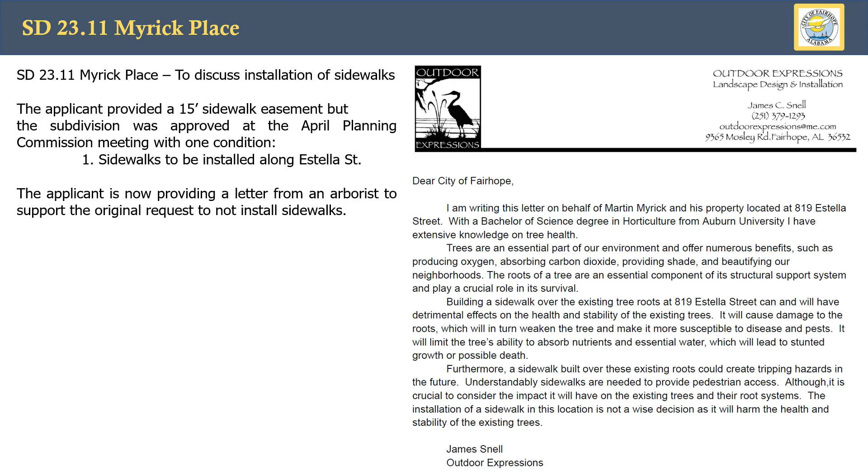They have since submitted a letter from the arborist supporting the easement only in lieu of installing the sidewalks there, due to the location of the trees. A copy of the plat, just as a refresher of where this is: it is one lot off of Greeno on the west side of the road. The applicant provided, we have Seth Moore and I believe Mr. Myrick with us here tonight to help answer some questions and go over their request in more detail.

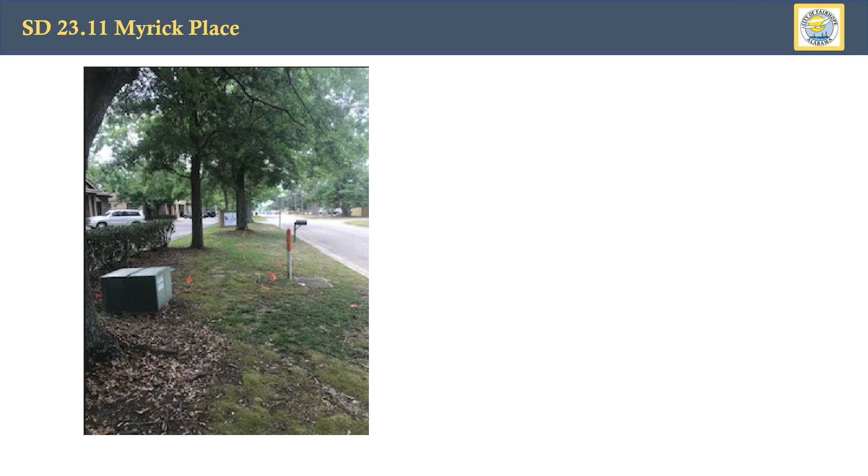Some images supplied by the applicant. One solution they have proposed, and I have a copy of that here as well, is doing some striping of a sidewalk area along this curb line that you see looking west from the east lot line of Lot 1, the image on your left. And an image looking back down the street next to the right-of-way where the sidewalk would go. You can see the trees in the image there.

This was the proposed plan, received this late this afternoon with those other images. This is a proposed 5-foot walkway that would be within that 15-foot sidewalk easement, a painted 5-foot wide walkway. But we have Seth Moore and Mr. Myrick, if you guys want to get up and discuss your options and what you're thinking about doing. Yes, thank you.

I'm Seth Moore with Moore Surveying.

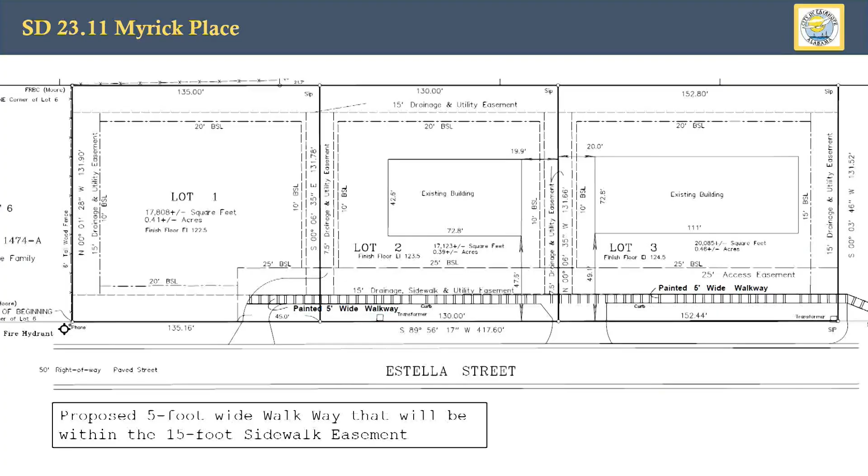As you can see in this photo, and in one of the others, without disturbing the ground around those oak trees, with the roots already on top of the ground being cut by the lawnmowers as they go along, we could easily come in and paint, like you would a crosswalk across a street, a walkway within that asphalt area that's already existing.

That's within that 15-foot easement. As the arborist mentioned, if we put that sidewalk in 2 or 3 feet off the edge of the curb, we're going to be cutting into the major roots of those oak trees. There are some pretty good sized oak trees and a couple of cypress in that area. If y'all have any questions, I'd be glad to answer.

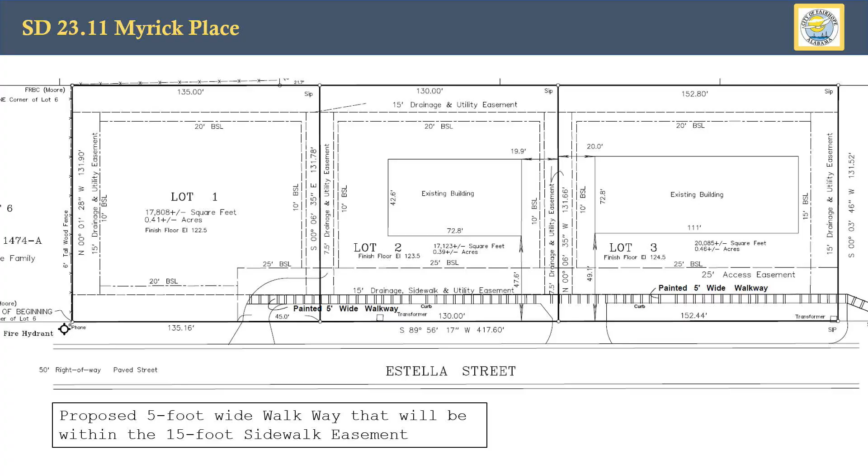So what's going to happen where that painted sidewalk stops? On the east side? On the west side? On the west side, what I envision is they're going to build a building, most likely just like they already have, with an entrance and exit, continuing the same thing along the asphalt and curbing.

That portion in Lot 1, they could build a sidewalk there. Yes, they could build a sidewalk there, sir. And we could angle it down, come back in when that building is built, and change the striping a little bit to connect up with that sidewalk along the front property line.

Commissioners, any questions? Mr. Moore, so as it's drawn, the sidewalk extends by 30% of Lot 1, and you say that would be built in the future when something is built on that lot. Why does that not extend to the end of that lot so it becomes more public access when somebody wants to build from the west to the east?

It is a 15-foot utility sidewalk easement, according to the plat. So when they build that building on Lot 1, they can put that concrete sidewalk in. And of course, not extending it straight on that way - what I envision is they come back and move it closer to the road.

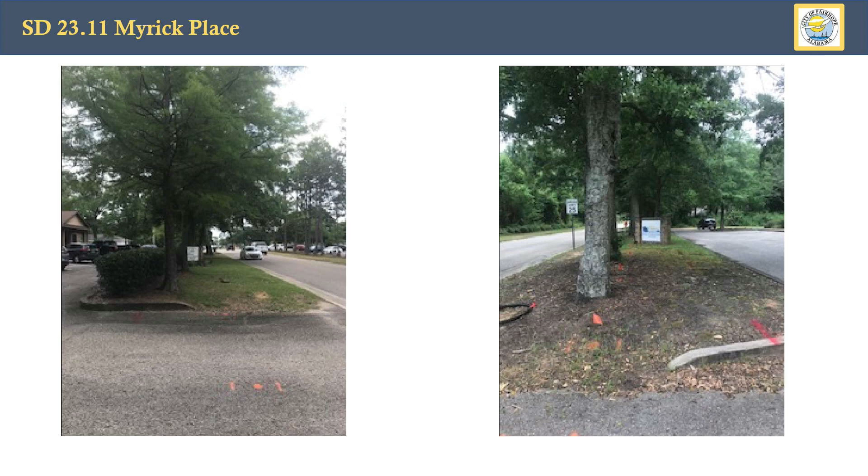What I would do is come to where that curb is on the left-hand side of the picture, then angle the painting of the striping to where the sidewalk would begin, on the west side of that turn-in. If you look on Lot 1, there is an ingress/egress to Estella Street. You would start your sidewalk at that western edge of the asphalt and go to the property line when they construct the building on Lot 1.

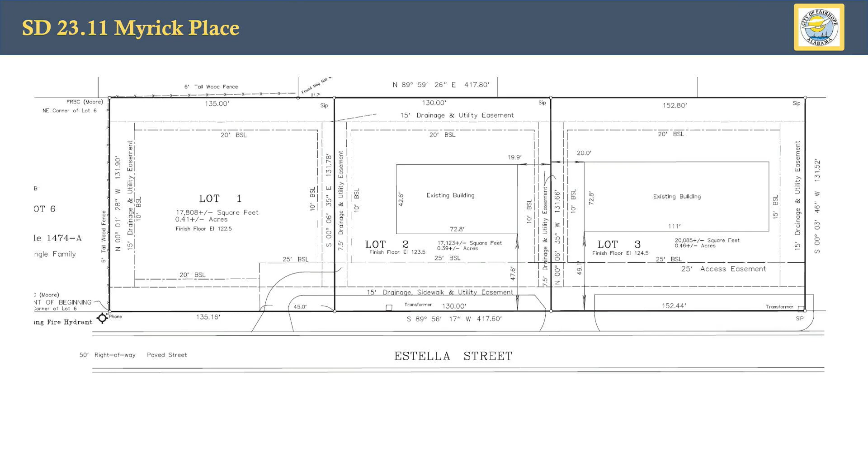So I'm just trying to follow - are we painting grass? Is this what we're talking about? No. There is asphalt.

No, on the first part, when you're talking about painting - see the left picture there? There's a curb that goes all the way down. They're talking about painting a sidewalk where that curb on the left would be the end of a 5-foot painted area, basically up against that curb. It would look like how you paint a crosswalk when you cross a street - that same thing running parallel to the street from the east line of Lot 1, going all the way past the common line between Lot 1 and Lot 2. Then when they build on Lot 1, like you do a residence most of the time, you build the sidewalk at that time. Yeah, just draw it right on that.

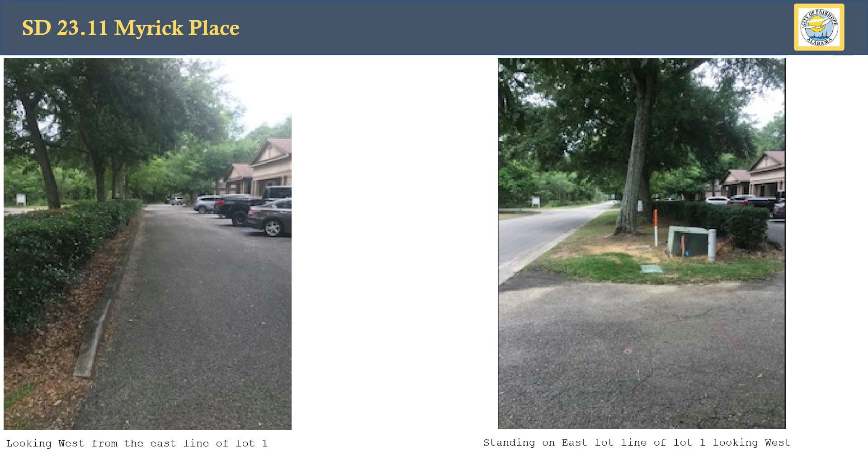I really appreciate every option we have. And there is a challenge here, but I do wonder if this is something we have in a few places in town. It gives us heartburn in front of Ace Hardware, where you have cars backing into a crosswalk or a walking path.

I'd at least like to explore Mr. Jeffrey's idea of putting a sidewalk on the other side of the street. There may be some challenges there we don't know about, but at least a big portion of that area is flat and easy to do. I think it's also a perfect area for maybe the city or some other entity to help make a connection to the sidewalk on Greeno Road. Just a thought. I'd like to explore that option before we commit to this, because this is a condition we're trying to get rid of around town.

It's also right in front of Provision. And if we're talking a public sidewalk, you've got ADA issues with cross slope and surface roughness. One of the things we battle during home construction is sidewalks have to be laid out first, and then your ramp up from the road has to match that. What we often see is the ramp up for the drive, and then the sidewalk hits it tilted the wrong way. So laying them out correctly from the beginning gives us a clean slate.

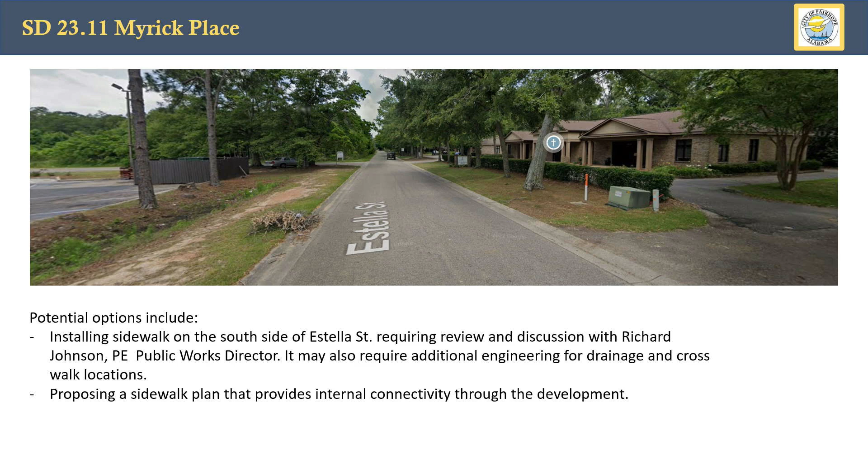Right, Mr. Moore. Yes sir, can I ask another question? Yes sir, real quick Mr. Chairman, if I may? Sure. And also Mr. Myrick—

Hypothetically, if there was a sidewalk built on the south side of the road as opposed to the north side, would you be opposed to that?

No, the only concern, the only reason I'm concerned is because I'm not opposed to a sidewalk, I'm just opposed to possibly killing some of my trees. That's the only thing, that's my only concern.

If we move it across the street, as Hunter was saying, as a council member I can't see committing funds to that. Everybody in town wants a sidewalk in front of my house, I promise you. But that is a connector, and part of another organization's push for sidewalks, and I know some others are being constructed. It just allows me to seek some funding for that, if it was even a possibility.

It definitely looks like you got more room across the street just from that picture, for sure.

As Eric points out, we tend to gloss over these things, but when you have ADA issues, it's sometimes not so simple just to build a concrete sidewalk. You don't have the room or the topography to do it, so you may have to put it on the other side. You probably have it a lot easier on the other side than on the north side, because there's a grade in several areas, coming up to the tree level, a good 1.5 feet, which would not meet ADA if done on the grade.

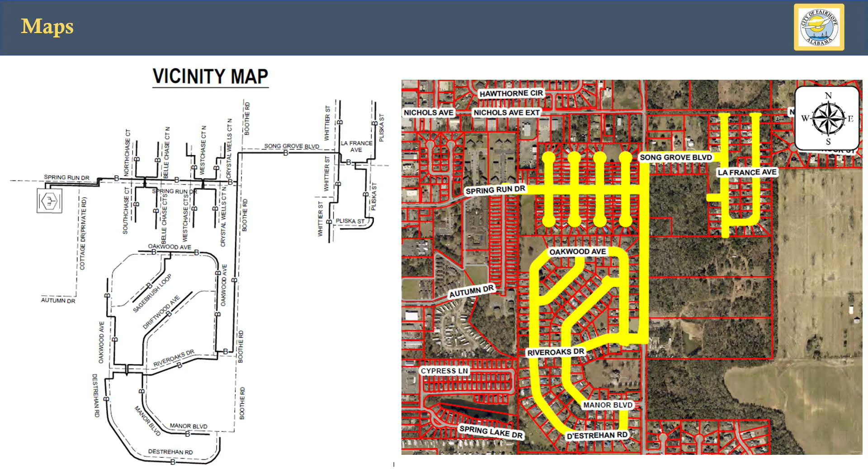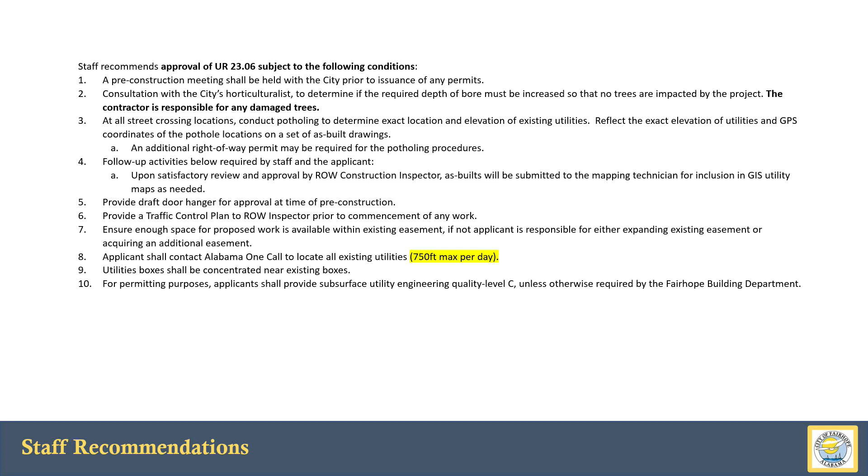Just showing you the area where they're proposing to install under this permit. We've reviewed it, we do not have any questions, so it's pretty standard. These are the same conditions, we don't have any new conditions. We'll typically talk about them if we do, but these are the same 10 conditions we use for these utility reviews. If you have any questions, I'll be happy to answer them, but otherwise this is pretty standard.

They're going to do door hangers? Yes. River Oaks is pretty standard.

West Chase Court is tight. That's a lot, that's really dense. Everyone else is familiar with that. We do require door hangers; before they start working they have to put up contact info, and we actually call and check that number to make sure it's somebody who can answer a question about this project directly with AT&T. So before they get started with work they have to do that, so there is someone a resident can ask what it's going to look like. That one especially could be disruptive, because everybody parks on the street, on the driveway, on the sidewalks. Just familiar where that is, it is pretty tight. I think those were the R3 PGH at the time, so real tight.

But no other question there, so we do recommend approval with our standard 10 conditions for these 11-52-11 reviews.

All right, UR 2306, do I have any questions? I have a motion to grant the request. Do I have a second? Second. Is that subject to staff recommendations, Jack? Subject to staff recommendation. Do I have a second? Second. Any further? All in favor say aye. Aye. Any opposed say nay.

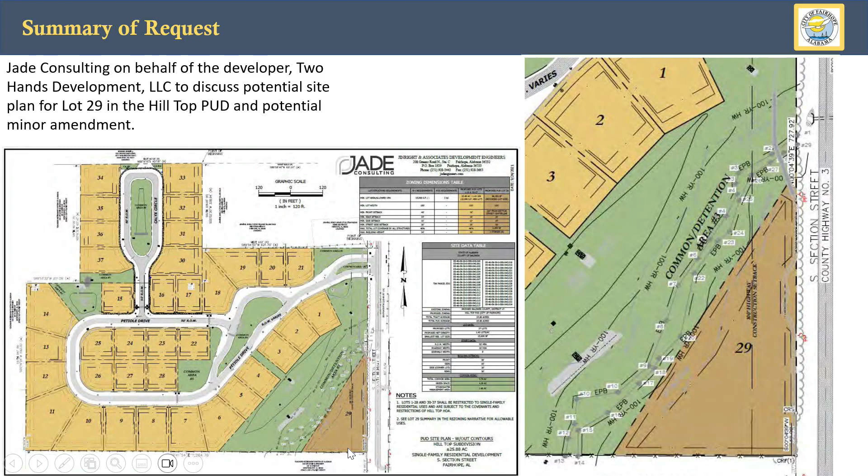There's a little bit more, and there's one plan that's tentatively going to be shown tonight, and there's another one as well that meets the 100-foot setback. But the real question is we'd have to amend the PUD, because that 100-foot setback made its way into the PUD as approved by City Council.

That has to be amended to do anything else, but that's where the conversation is. I'm going to let Trey really just speak about the building, but I do want to flip to the end. There's some wetlands. I think moving up to the front is something we agree with. When you look south of this property, immediately south, there are buildings 30 feet off the road. You look at some other subdivisions right there, they're also 30 feet off the road, some even closer.

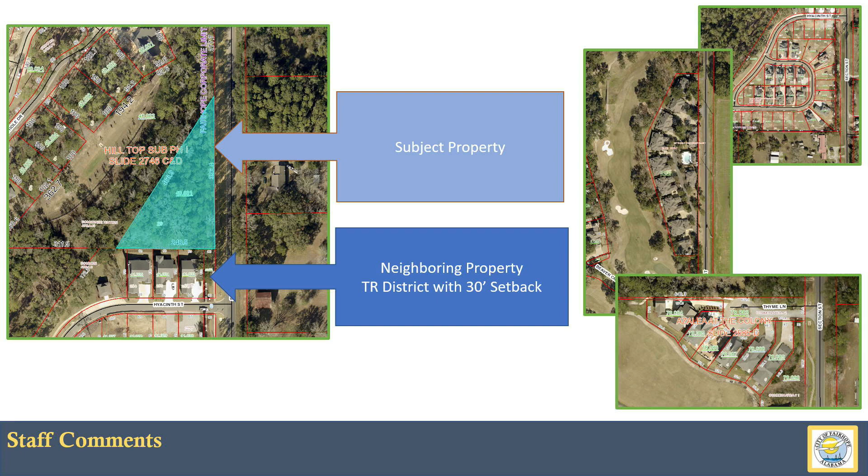So we are in agreement. The informal review here is really to look at the building before they make an application to amend the PUD, because that'll come back to you, but ultimately it'll go to City Council for approval. Trey, you want to add anything on the actual layout and building?

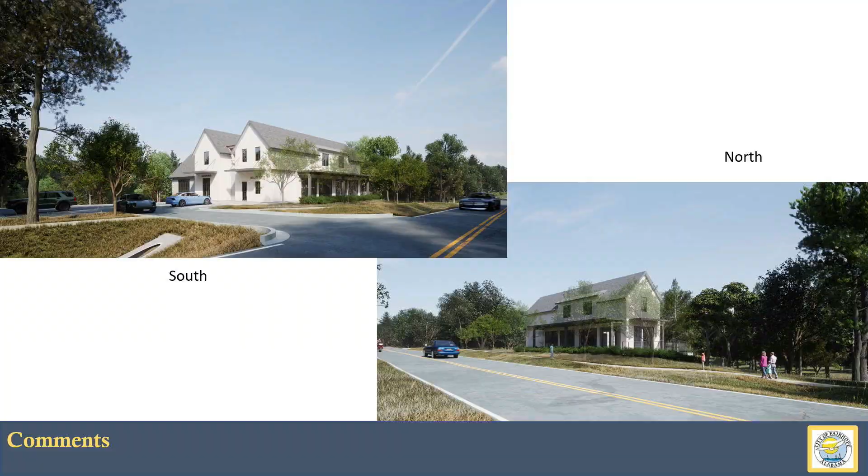If we set a tone here, that'd be an opportunity to build off of it as you move your way into town and out of town. We're also looking at some projects across the street, which would help us figure out how to set up this zone. So that's really where I'm at, and I just wanted to get your feedback. Thank you.

First, I apologize for being late, I got held up. But I know we're not talking about uses, but when Jason first came in, at one point they were talking about possibly a community building or a guest house, or hospitality.

I'm just curious about the uses with the form, if there's anything—it may just be too amorphous. Nothing has been proposed to be changed. There were no specific uses, but there were limits of uses. Anything that kind of gave us heartburn, I think they removed.

They even had some 2-story and 3-story proposals. It was weird the way the land fell, and pushing it all the way back toward the wetland buffer starts getting into some trickier situations.

I don't think we're really discussing any further limitations on the uses at this point. I think what's in there—and these projects all run together, so please excuse me if I state it wrong—but I think it's probably maybe a market in there, a coffee shop kind of use. There may be an art gallery in the back there, okay. And then maybe some short-term rental type deals upstairs.

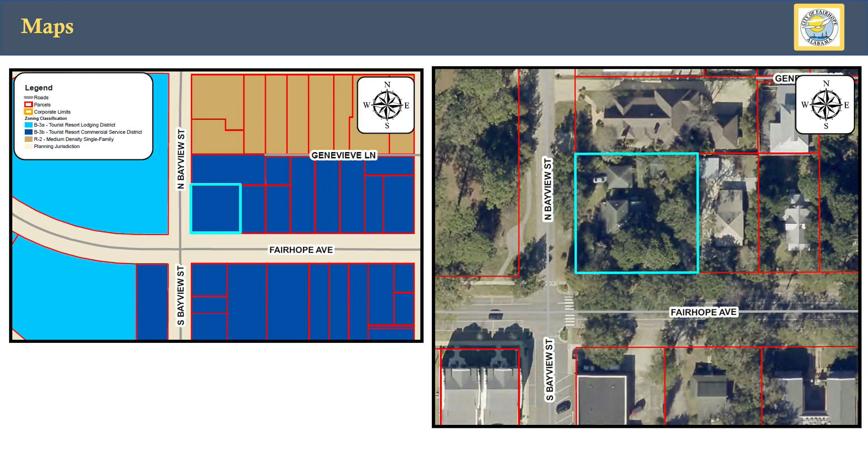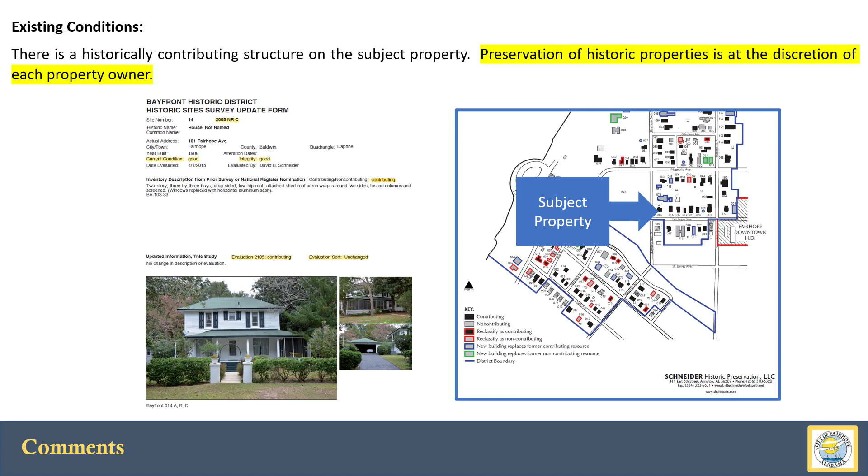So we've reviewed this per the subdivision regulations. MOPs with 4 or fewer units are eligible to submit an application for both simultaneous preliminary and final approval. The site plan is on the screen below. It shows 4 buildings, common areas, the interior private open space, if you will, the courtyard shown in yellow, and the shared drive on the north side of the property.

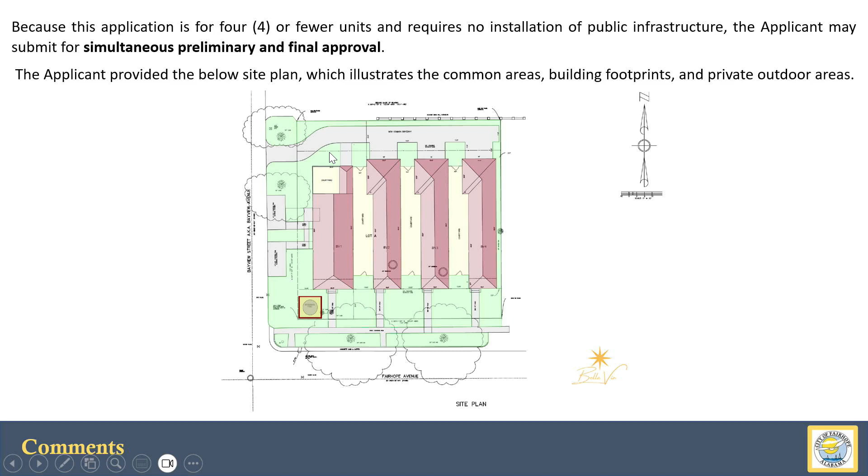Parking, the zoning ordinance requires 2 parking spaces per residence, which would mean 8 spaces on site. So the applicant, to avoid removing a street tree—originally the drive went through where this tree is, and parking was provided here, but the driveway was moved to avoid that tree. But that took out 2 parking spaces there, so the applicant has proposed to install 2 parking spaces in the right-of-way, getting credit for 2 other spaces nearby, or provide bike parking. That ratio is allowed at a 2-to-1 rate, so the Planning Commission may grant the credits for that on-street parking. I highlighted those because those are an action item.

If approved, the parking pads on North Bayview will be pervious and approved by the City of Fairhope Public Works Department. There was already agreement that those would be pervious pavers if approved.

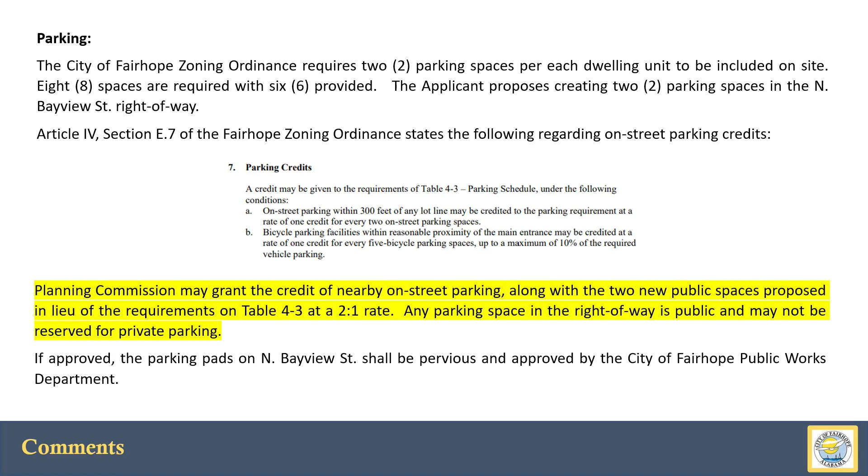The utilities are all provided by Fairhope. This is the utility plan presented. The electric department will require a 10 by 15-foot easement for an electrical transformer if approved. The drainage plan was conducted by Jason Estes with Dewberry.

It's basically collected as part of the MOP infrastructure in underground pipes that will feed into a drainage basin, and they've met all of our subdivision regulations. We will require, if approved, all the homes to have gutters and tie those gutters into that system.

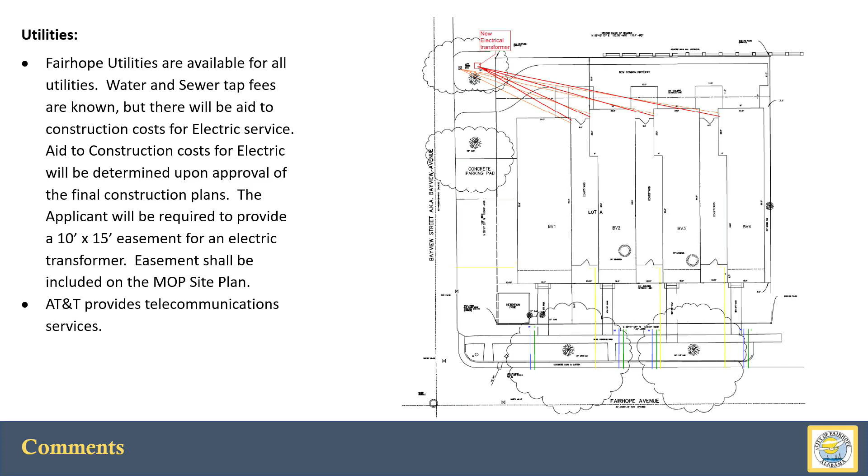Just a couple of notes here. A grading and BMP plan will be required for the permit, for the land disturbance permit to install that drainage infrastructure. There is a little bit of a conflict—I'll get into this a little later—but the site plan shows 65% lot coverage on each of the condo lots, where the verbiage of the condominium plat shows 75%. So there's a little conflict there as to which rules, but we're saying here 65% unless we change it, making sure the drainage accounts for those rooftops.

We do require as a MOP, since it's a subdivision, an O&M plan that shows how to maintain that drainage system. We have not received that at this time. There is a drainage basin, essentially a wall filled with gravel that recesses down.

There was a proposal, and we saw some ideas. I think it was a good idea in this situation. It's not just a gravel drainage basin, you can actually incorporate fountains or sculptural elements. Final designs haven't been approved, but I think the concept is admirable.

Per Richard Johnson, since we have this drainage plan, this comes up quite a bit on what we call the halo easements, the drainage easements around the property. We know where every utility is coming in and what the drainage is doing, so we do not require those halo easements. There are 4 lots where the inline drainage is and the drainage basin on the corner of Fairhope Avenue and North Bayview.

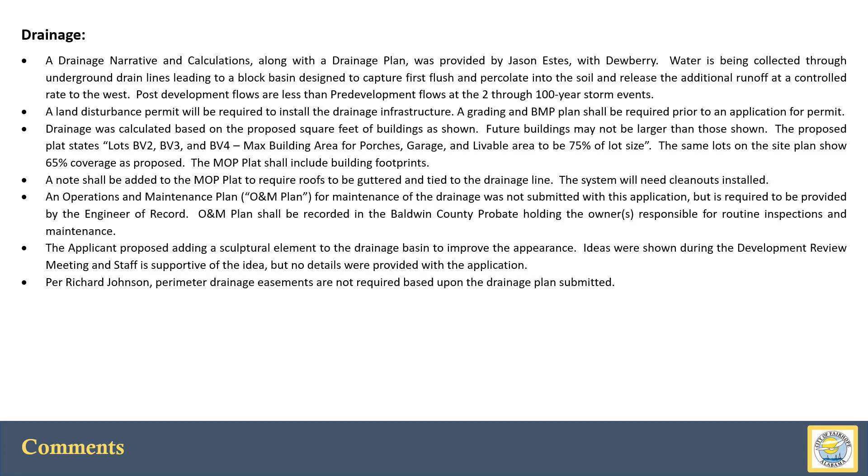Kind of a quick detail of what that looks like. I think this is only a 30-inch wall, but this is showing the subterranean view, where the drain line comes in. It pours here instead of running right off the property onto our right-of-way.

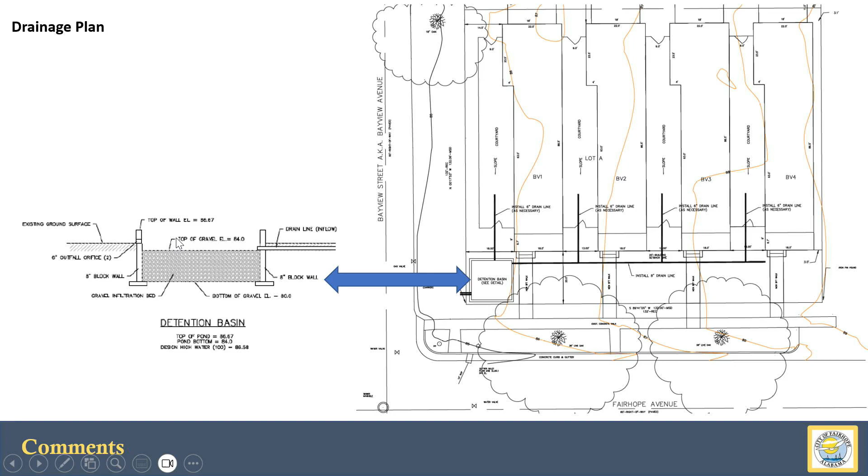Green space meets requirements. This is a small site, 0.4 acres, so there's not too much green space required. It's 20%, but with the 20-foot preserved on Fairhope Avenue and the 10-foot on Bayview, they met that requirement of 20%.

Now, the landscape and trees, this is kind of where we have the biggest contention, I think, if we call it that. There are 2 very large magnolia trees on site, 30 inches and 36 inches in diameter. The applicant did request to remove those trees. Jamie Rollins, our horticulture supervisor, denied the removal. You all saw those letters in your packet.

Jamie can consult with the tree committee on that. The tree committee did vote to recommend allowing the 2 trees to be removed, conditioned on 2 12-inch live oaks being planted in the North Bayview Street right-of-way. While we were there, there was mention of a 22-inch cedar tree also that may be in the right-of-way. They did not recommend approval of that one; it really wasn't discussed.

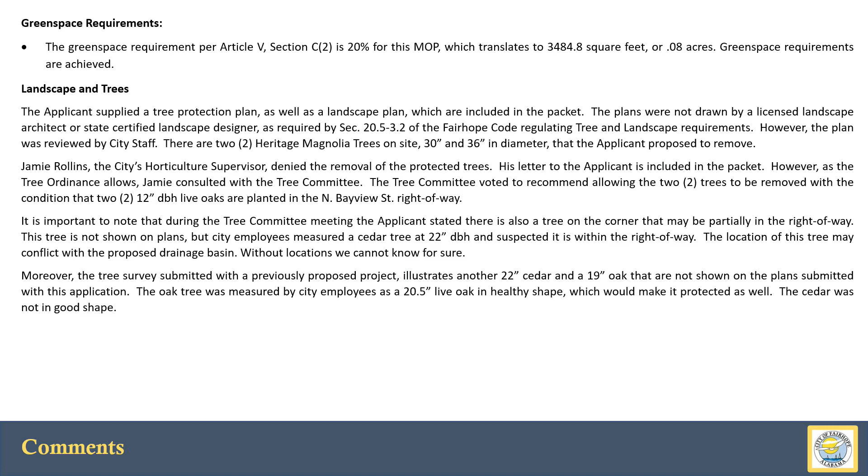We did see an informal review of a project on this site, but it also included the property to the west. It was a 30-unit hotel. They provided a tree survey as well. There are just some conflicts between the two surveys.

The trees shown in yellow were not included on the plan with this application. One of the magnolia trees was shown 10 feet away. Jamie went out Friday and said it's definitely not 10 feet away, but we've got two surveyors surveying the same tree and they're 20 feet off.

There's some confusion there. He did measure, I think this tree was an oak species. I believe I'd say it's a live oak. And this is a cedar tree in very poor health, so it's not worth saving here.

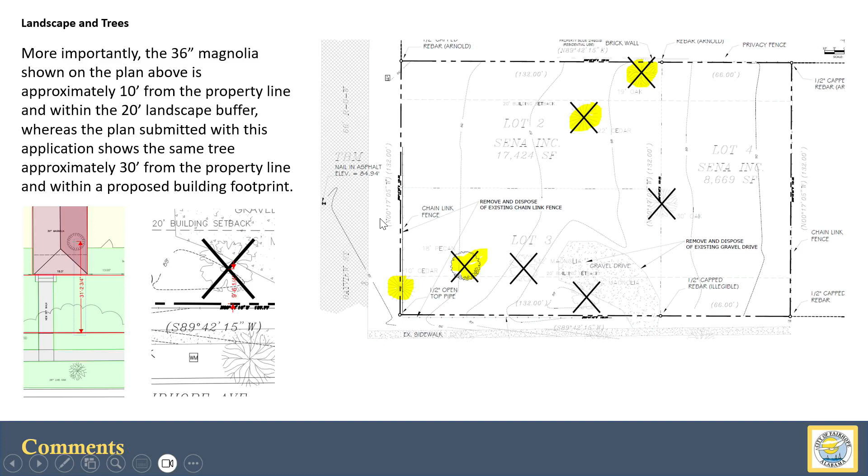But there is a cedar tree here that's partially in the right of way. It is a protected tree. I believe there were two crepe myrtles here in the right of way, also slated to be removed. And I didn't have this one - there's a large water oak here on the property line that was slated to be removed.

Because we don't really know where those trees were, there are tree credits, there's mitigation... Isn't there supposed to be a landscape plan with your application that shows all of this? Yes, that's what I mentioned in the plan. We did not receive that; this was the landscape plan submitted.

It's actually a slightly earlier version of this, so those trees were not on here. And we're kind of saying, hey, we actually need that. That's part of the tree ordinance.

I mean, do trees really matter in that area much? Do we really care about trees that much? Why not just take them all down and go lot line to lot line? I mean, get a bigger building there. Well, you know, not there - get leaves on your car or something.

We've debated, and we did confirm today that Lee and I neither like to be wrong, but I am right in this situation. Heritage trees are protected in the CBD, so we don't allow clearing of trees even in the CBD lot line to lot line.

I'm a fan, I agreed with saving the two magnolias, but some of these others that are not there, they do not have any mitigation. So I think that's one of the challenges here is to prove something, and I get to the point where we don't know the answer. I think they can be preserved. We can deny the removal of those trees, and the only recourse is appealing to our court, not the tree committee.

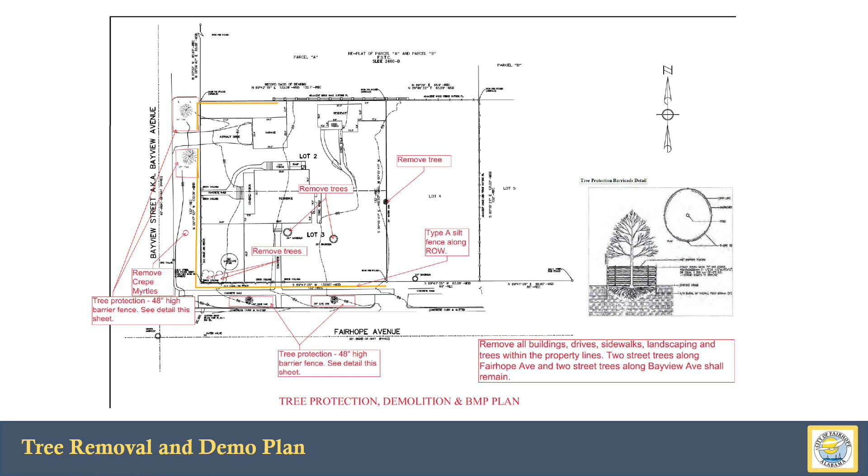Sidewalks: there is a sidewalk on Fairhope Avenue. North Bayview does not have a sidewalk. There's very little room inside the property, so there's not a sidewalk shown, nor is there an easement provided. If the planning commission is willing to allow both of those to go without either the installation of a sidewalk or an easement for a future sidewalk, that will require a waiver. We did not advertise that waiver this month before approving a final plan. Garbage collection is easy.

How will that sidewalk fit in with those two parking spaces? It's a challenge. Could it happen? Absolutely, but we have sidewalks and parking around already.

Now it gets a little trickier when you've got the trees, and the landscape plan did not include the 12-inch oak trees as the tree committee recommended. So figuring all those things out in the landscape plan is what we really need to see. How can that work?

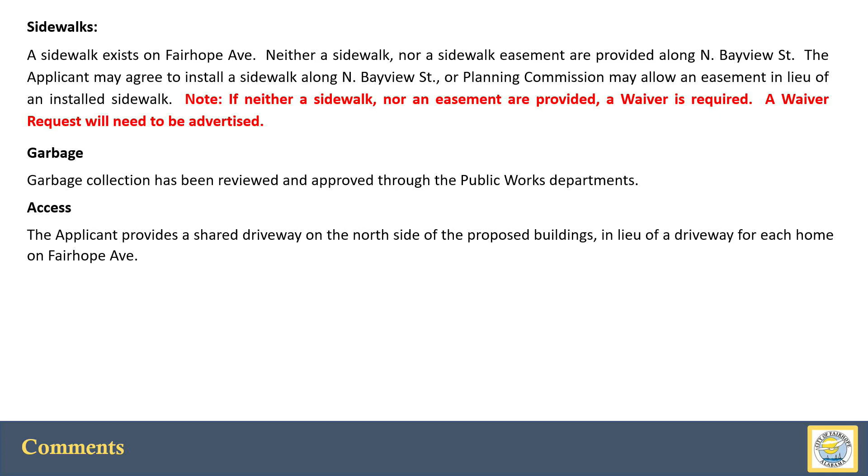Let's say the buildings, by right, B3B allows certain uses. I think it was the intent to use these as single family, which is allowed, but so are other uses. We've talked about this before. Short-term rentals are allowed here. We actually encourage it, it's something that we designed into our zoning ordinance. I do not recommend allowing things like covenants to restrict that to a single-family use to try to override zoning.

There's some allowed by right uses. So if approved, we would recommend some limitations on that on the plat. Some are by right, some are approved via Board of Adjustment.

There would be a MOP plat required at final plat. It's not finalized. We need to have an engineer of record sign that, with a signature block and their certification, and just some of the standard notes. This was the proposed MOP plat. This is a little bit more what I call out in the next one as a condominium plat that really draws out the land condos.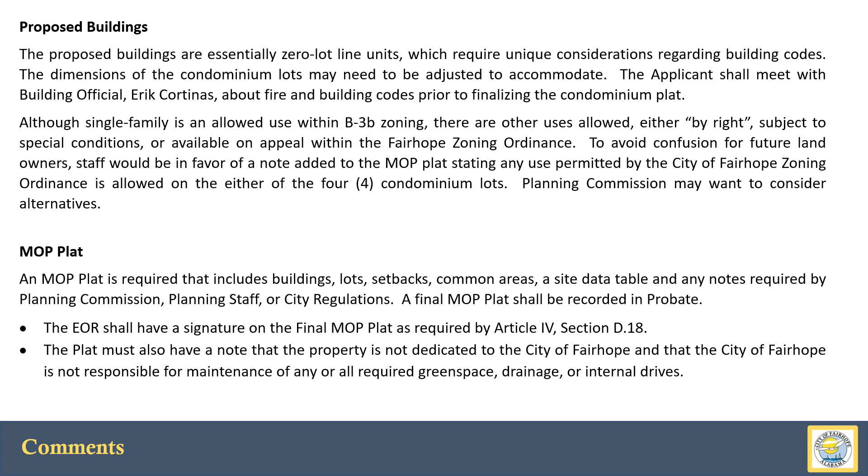Unless we know exactly where the buildings are, I would not recommend putting those on the condominium plat. You'd have to change those every time a building moves a foot to accommodate something. There also would be an administratively approved replat required to combine the lots, as we discussed last month in the informal review.

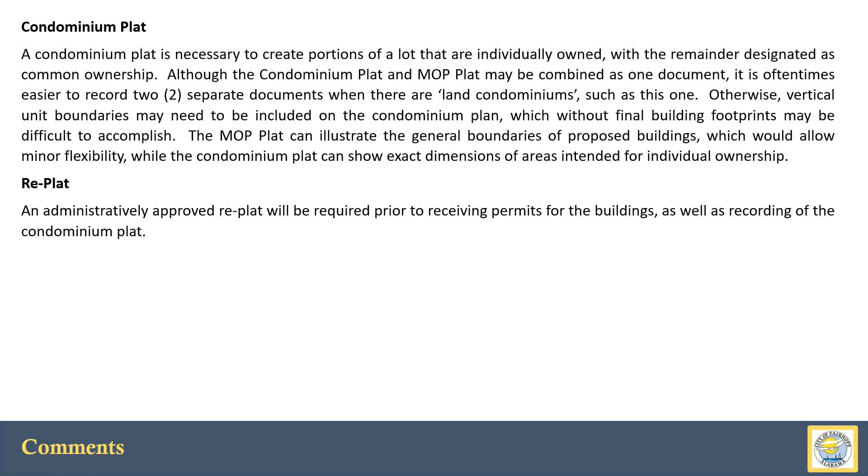So we get to the first question here: it's simultaneous preliminary and final approval. I cannot recommend that we give final approval on that. I feel pretty adamant about that, at least personally. We don't have enough information. Those finals are ready, usually about 90% ready, to submit a building permit and start infrastructure and construction. So the landscape planning in and of itself, we don't know where the trees are, which ones can be saved, which ones, as a city entity, we're going to say you can't remove.

So the domino effect goes: if we say save the cedar tree, the drainage basin has to move. That changes the engineering plan. We're not ready for a final, and I gave some examples there. So we do recommend denial for the preliminary and final approval of this project.

The Planning Commission may condition preliminary approval with conditions, and we made a list. We can talk them through if you want to. I highlighted things that actually require some review, so parking and sidewalks need action if you intend to approve a preliminary review of this. But that's kind of what I have.

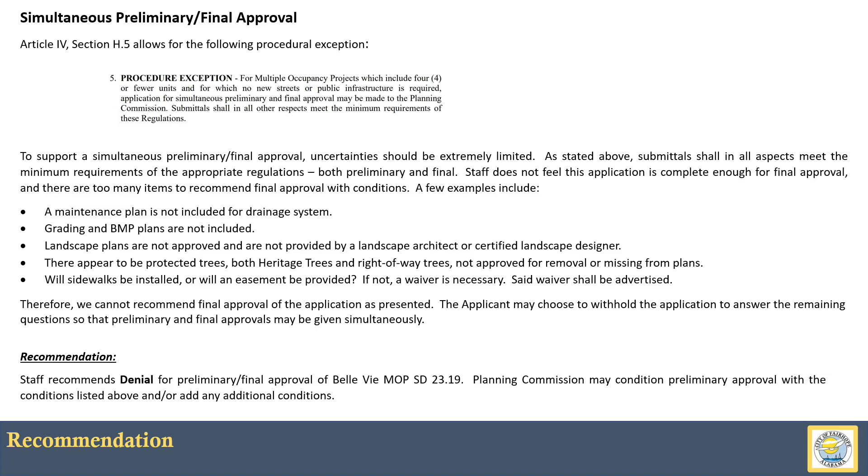If you have any questions, the applicant Trey Cordy and Wendy, I believe, are here as well, if you have any questions for them. This is the first one on our agenda that is up for final. We do not meet within 30 days, so standard comments that you normally make. The public hearing is on the application presented to you. If that is open, I would say you need to act. We do not have the luxury of tabling a final plat one time without the applicant's request. So with that said, thank you Hunter. Trey, would you like to present at this time?

Okay. All right, Trey Cordy.

So we're proposing to build 4 single-family houses on the 2 lots. The reason it's condos is because the city ordinances and regulations don't allow us to subdivide into just 4 lots. So that's how we went with that. And since single-family houses are approved, that's where we went.

We originally, this was a hotel that I had no part of. That was the prior owners or whoever was buying that. And one of the adjacent neighbors are here, and one of the things they had a big problem with was all the garbage and stuff backed up to their house. So Wendy and I feel that this, in our beliefs, is a better use of this property, just 4 single-family residences rather than a large single building with offices downstairs and residences upstairs.

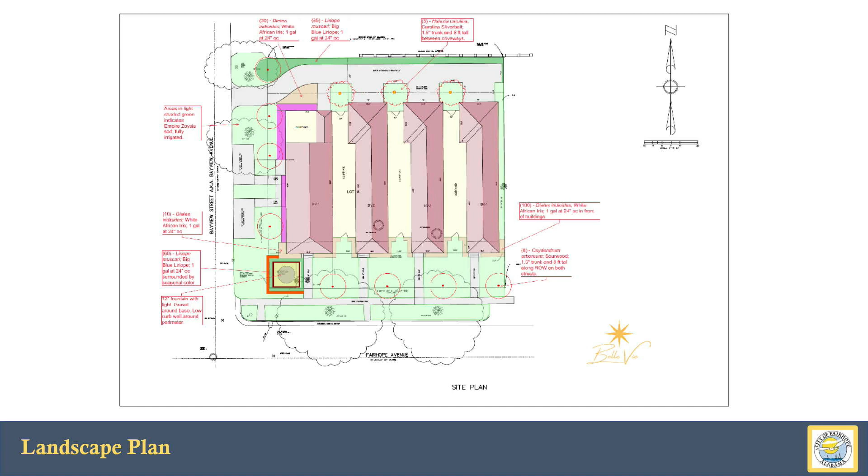One of the things the staff said is that the drainage structure has to be complete before we can get final plat approval. So what Wendy and I would like to do is request that y'all approve a preliminary plat tonight, and then we will come in and build the drainage structure, and come back and get the final plat once it's complete. That would take care of our request for asking for final and preliminary at the same time — we'll just ask for preliminary tonight and come back and get the final.

The condos — like I said, the reason we did that is because there's no way to do just 4 lots like a subdivision. The site plan that was submitted was not part of an MOP submittal. I added that as an example of what we would do, and we're actually building something similar to this in Mobile, in DeTonti Square. I know it's Mobile, but we won an award for best new construction in downtown Mobile for that project.

The architecture will be totally different — these will be more grand, more coastal, to fit into Fairhope's architecture, not historical like we did in downtown Mobile. We can change that up. So, about the condos...

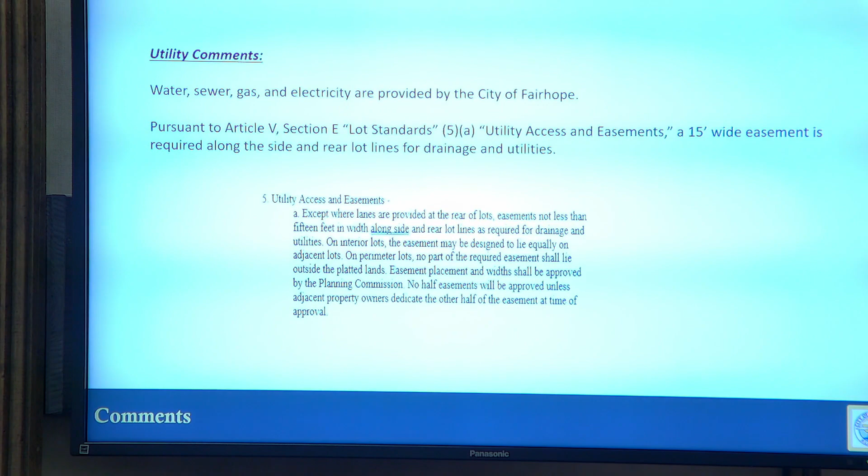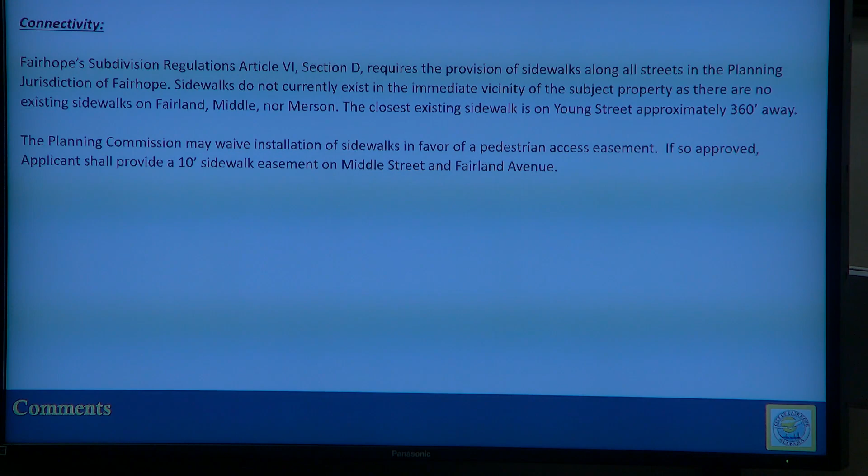There's no sidewalks really in the vicinity, so the closest existing sidewalk is actually on Young Street, which is 360 feet away. As you guys are aware, you may waive the installation of sidewalks in favor of a pedestrian access easement. If so approved, the applicant shall provide a 10-foot sidewalk easement on Middle Street and Fairland Avenue.

So this one has some conditions, but they're pretty easy. Just add a note on the final plat regarding using the then-current setbacks at the time the applicant applies for a land disturbance permit, in case those were to change. The final plat shall have a 10-foot sidewalk pedestrian easement along both Middle Street and Fairland Avenue. It should also have the 15-foot utility easements Hunter mentioned on the rear and sides of the lot.

Add the finished floor elevation notes to the final plat. Lots on the plat shall be labeled 13A and 13B - that's just good for posterity so we can follow it. And then the engineer owner shall provide an agent authorization letter, which is some housekeeping.

I don't know if anything from Austin is here, or the Johnsons. Anyone? Okay.

All right, any questions for staff at this time? All right, what are the size? Give us a second to answer there, Lee. Oh, sorry about that.

What is the size of the smaller lot in acres again? The smallest lot is 11,262.26 square feet. I did ask for acres, but you can give us that. Oh yeah, I see, well it is acres, so - 0.26. I use the cheat sheet on that.

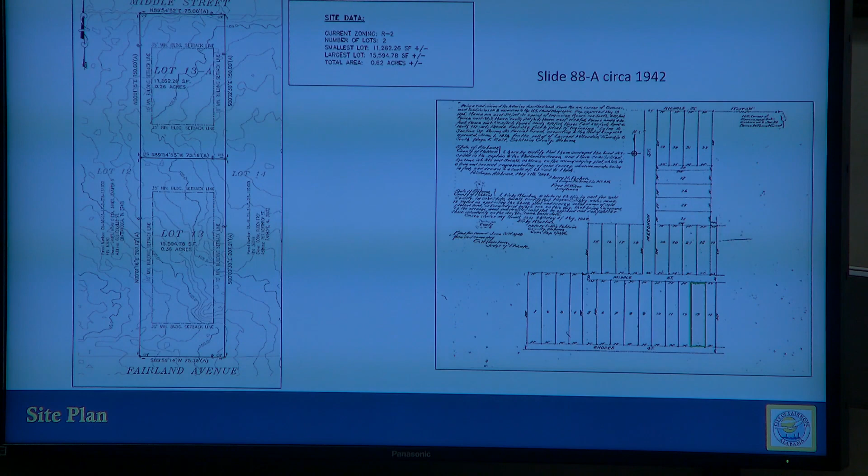We only use acreage on the other side of Greeno, Jack. That's right, well I like to practice my math. Our R2 is broken down by square feet, not acreage, when you look at the minimum lot area. I understand, but I can take the quarter and multiply by 44,000. Yeah, all right, well I can't. Any other questions? Any other questions for staff?

All right, thank you much. I'll go ahead and open the public hearing at this time. Does anybody from the public wish to speak to this item? Yes ma'am, come on up.

If you'll state your name and address, and you can pull that microphone down. My name is Sally Burns. I own property on Middle Street. And my only question was - shoot, it's about the water, fire hydrants, thank you. So will they be responsible for putting in fire hydrants there when they build?

If it's not - it's my understanding you have to have a fire hydrant if you subdivide within so many feet. Correct, so there is a fire hydrant within that many feet, or staff would have had that requirement. Okay, so that's already been addressed? I think, is it within 1,000 feet? 450 feet.

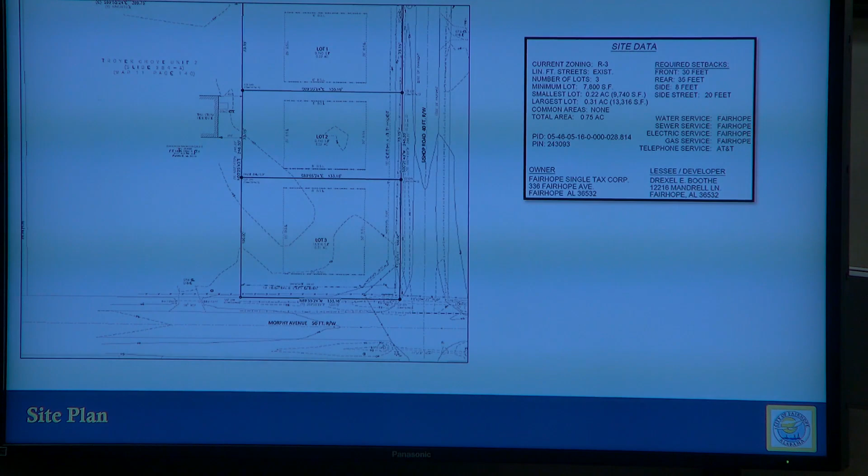So there you go. The smallest lot is 0.22 acres, the largest 0.31, total 0.75. Morphy Place already exists in the county probate records. I'm not sure if it actually exists for real, but it's in there, so it's one of the things we check so it's not confusing for us later down the road.

The signature block needs to be planning commission instead of planning director, no big deal. Finished floor elevations need to be noted on the final plat for each lot. A fire hydrant is located on Morphy Avenue across from Lot 3, and all 3 lots meet the minimum lot requirements for R3, which is 7,800 square feet.

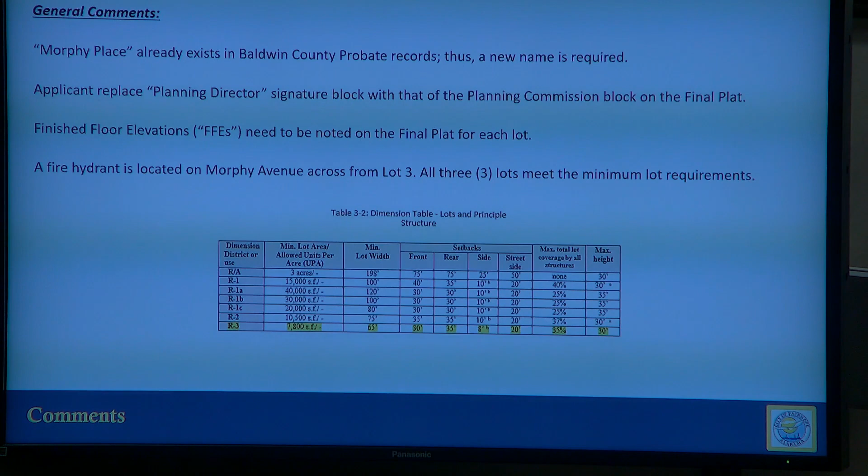So it's kind of congested there, as we are aware. For traffic and safety reasons, the applicant is required to, and has agreed to, install the driveway on the upper 1/3 of Lot 3 off of Bishop Road, not Morphy, and a note reflecting access restrictions shall be added to the final plat. This is minor, and it was reviewed accordingly, some things just weren't required.

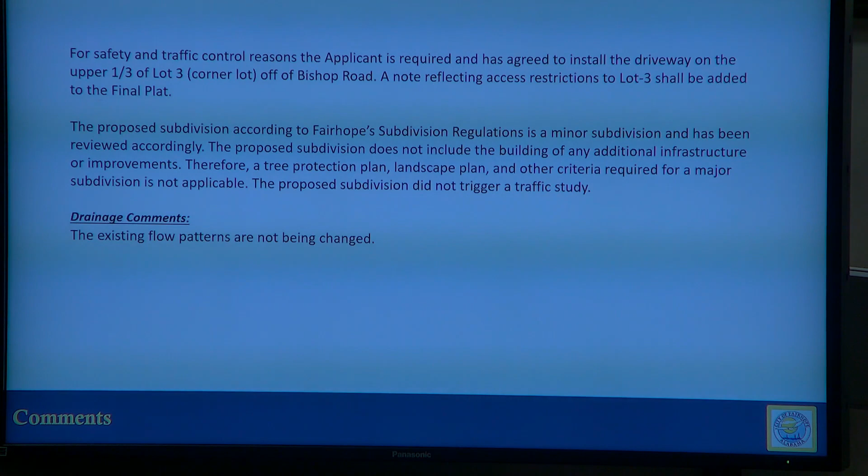Again, the existing drainage flow patterns are not being changed. For utilities, water, sewer, gas, and electricity are provided by the city of Fairhope. There will need to be an additional transformer, but it will most likely be placed on a utility pole in the right-of-way at the intersection of Bishop and Morphy within Lot 3.

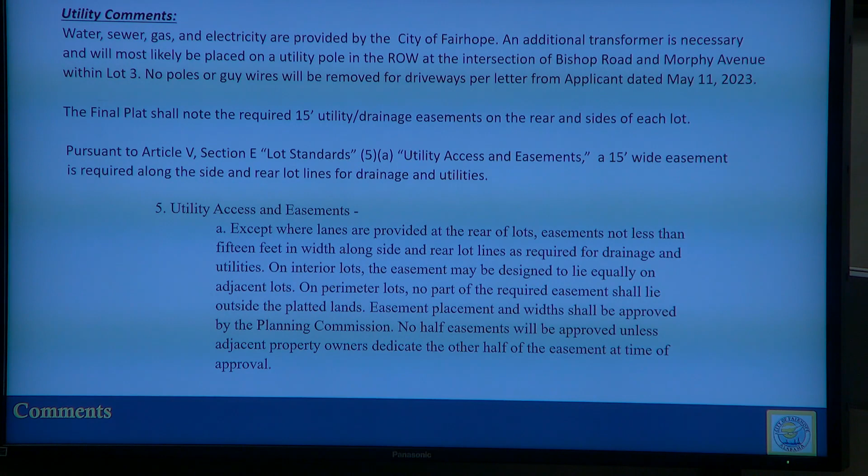No poles or guy wires will be removed for driveways per the letter from the applicant dated May 11th, which is in the packet, I believe. The final plat shall note the required 15-foot utility drainage easements on the rear and sides. That's what it looks like, so you can see there's a lot of activity with the poles that are there and guy wires.

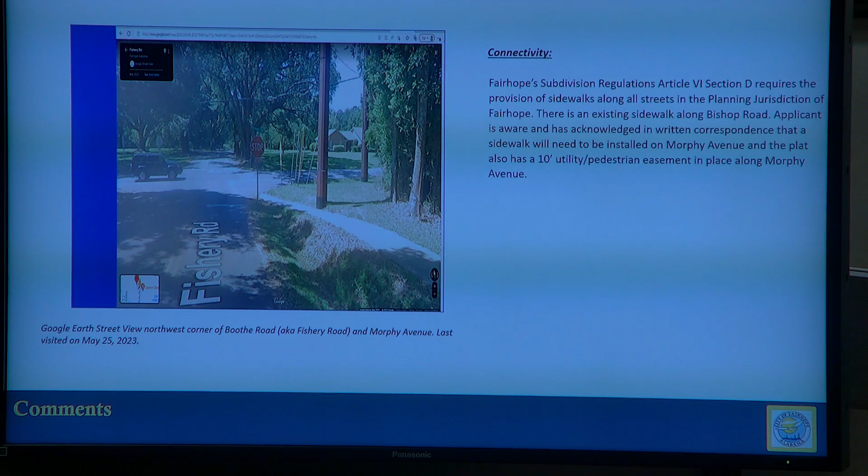For connectivity, there is an existing sidewalk along Bishop Road, and the applicant is aware and has acknowledged in written correspondence that a sidewalk will need to be installed on Morphy Avenue. The plat also has a 10-foot utility pedestrian easement in place along Morphy.

So we do recommend approval with the following conditions: change the name, add the utility drainage easements, change the signature block per the report, add the FFEs for each lot on the final plat, and add a note that access to Lot 3 shall come from the north 1/3 of the lot adjacent to Bishop Road, or any joint agreement with the owners of Lot 2, the middle lot, and install those sidewalks along Morphy Avenue.

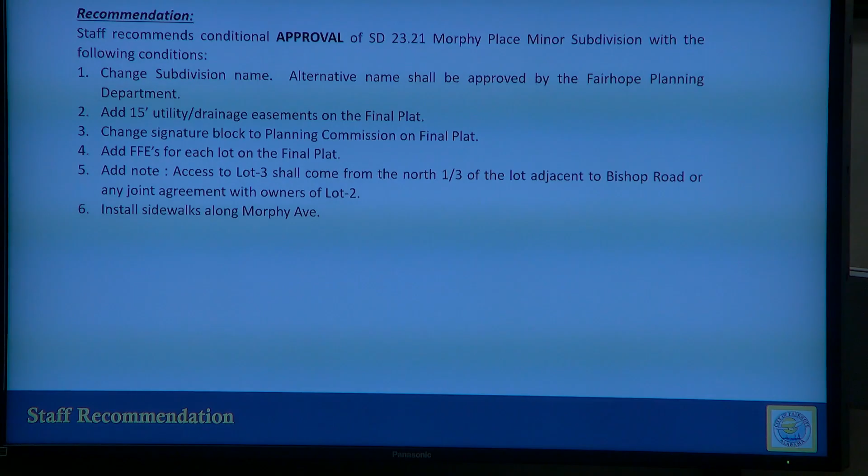Now I'm here and Aaron's here too. Any questions for staff at this time?

Did Fairhope Single Tax have to approve this as well? No. Fairhope Single Tax hasn't been brought up in a long time. As president, the secretary and I at single tax sign any application that comes up, regardless. Single tax is totally neutral on any subdivision, any zoning, that's all up to our lessees. So whether we love it, hate it, think it's a great idea, or think it'll fail, we just carte blanche put our signatures on it. They go in our bins and we sign them. So there's just a spot on there. The only reason we sign those is for the banks to dot the i's and cross the t's to meet all the municipal and bank regulations.

Yes, sir, how y'all doing? Good. Aaron Collins, SE Civil. I'm really here just to answer any questions. We've pretty much agreed to all the staff recommendations, and we have no problem adding any additional items to the plat that are requested there.

Thank you. Did you lose the coin toss with Larry as to who had to stay to the end of the meeting? I lost. Okay, thank you.

I'll go ahead and open the public hearing at this time. Does anybody from the public wish to speak to this item? I don't see anybody from the public here. Well, we have one person from the public here, but in that case, I'll go ahead and close the public hearing at this time and turn the meeting back over to the commissioners.

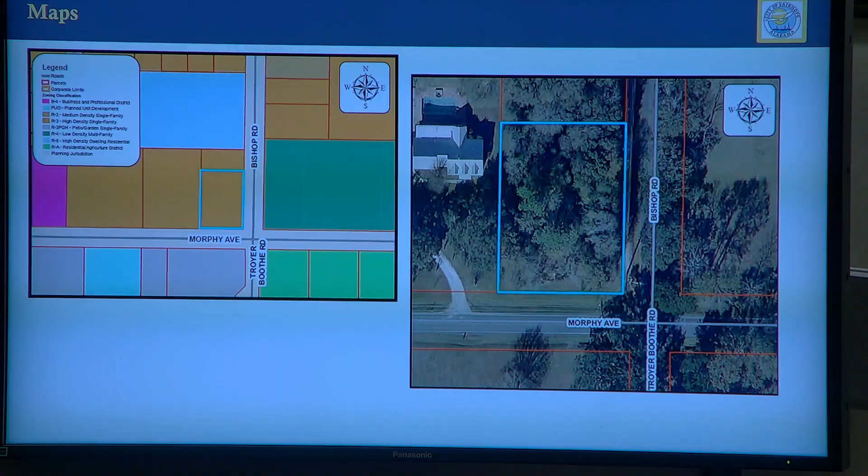So you get areas where maybe on Morphy you've got houses all the way along - I'm not talking about this specific case, but this comes up a lot, especially in the Fruits and Nuts area when people do subdivisions. I think we ought to make sure we understand what we're allowing when we approve these, so we don't end up with nice houses with 35-foot setbacks next to someone's garage sitting 15 feet further out, with metal screening and a couple motorcycles stored right next to the front of their neighbor's house.

Anybody who says it's difficult to develop in Fairhope hasn't tried developing many other places. We've tried our best to help people, but sometimes we pay for that - like allowing lots in Fruits and Nuts to be set up for cottages so big they can't even park on their own property and have to park in the right-of-way. We keep opening ourselves up to this. When we subdivide in Fruits and Nuts or other areas and allow people to put garages in what would be their neighbor's setback area - is that how we want to develop property in the future?

Again, I don't think this is the forum for that discussion. As the subdivision regs are currently written, this meets every criteria, and hopefully whoever develops that property will want to be off Morphy and do something attractive there. I just wanted to mention it, and maybe Rebecca can bring us some items, or Hunter can share what other municipalities do in this type of case.

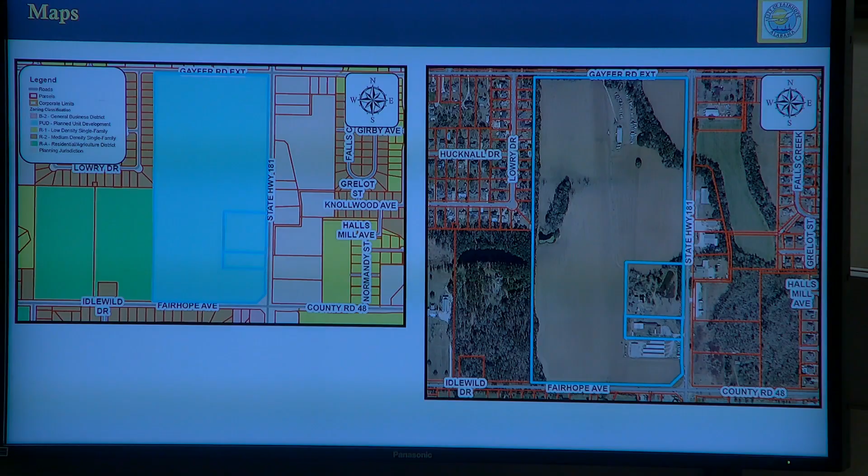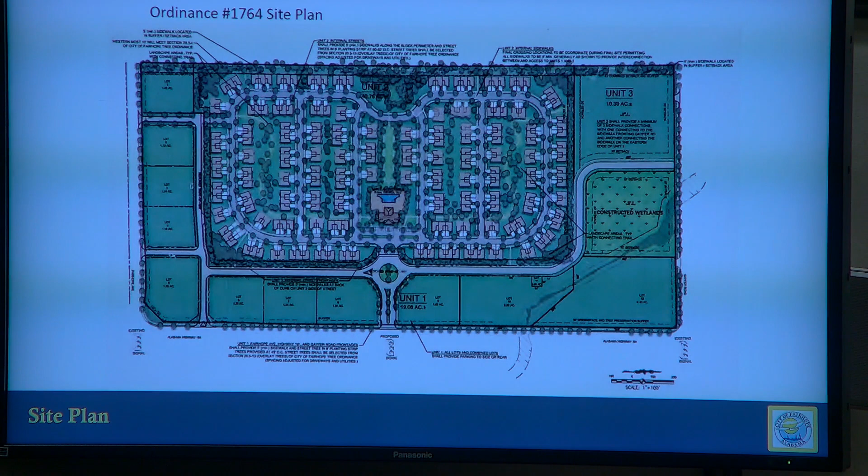This is the Ordinance 1764 site plan that goes with every planned unit development. If you'll recall, the previous version had another entrance that came out onto 181. After discussion with Planning Commission Council, it was recommended to have the entrance connect to Gayfer instead, eliminating the one on Highway 181. There is some constructed wetlands on the northern side of the property, the right side of your screen, which we'll go into more detail on in a few slides. A copy of the plat again shows where the wetlands are located on the northern side, as well as the wetland buffers, floodways, and areas that go through there.

As for utilities, any connections or work done in ALDOT right-of-way will require permitting from ALDOT. Utilities within Fairhope right-of-way will require permitting from the City of Fairhope Building Department. Water is provided by the City of Fairhope, and the final construction plan shall be approved by the Fairhope Water and Sewer Superintendent, including potential aid to construction cost, and all materials shall meet the current versions of the City of Fairhope standard specifications for constructing sanitary sewer facilities and water facilities.

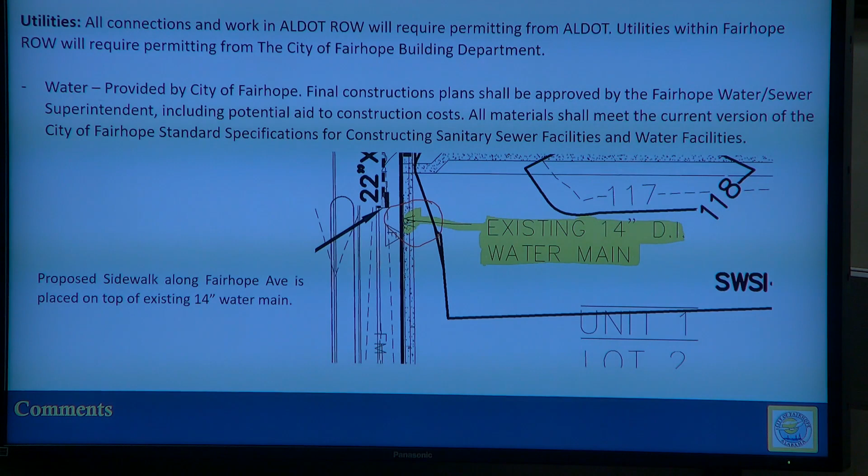We know there are some conflicts. For example, on the screen there's a proposed sidewalk along Fairhope Avenue, which is placed on top of the 14-inch water main. The sidewalk may need to be adjusted—that's something the Water and Sewer Department can discuss at that time. Sewer is also provided by the City of Fairhope, and again, the final construction plans must be approved by the Water and Sewer Superintendent. On the screen is Lot 12, which is actually the location where the new lift station will be located, and that lot will be deeded over to the City of Fairhope.

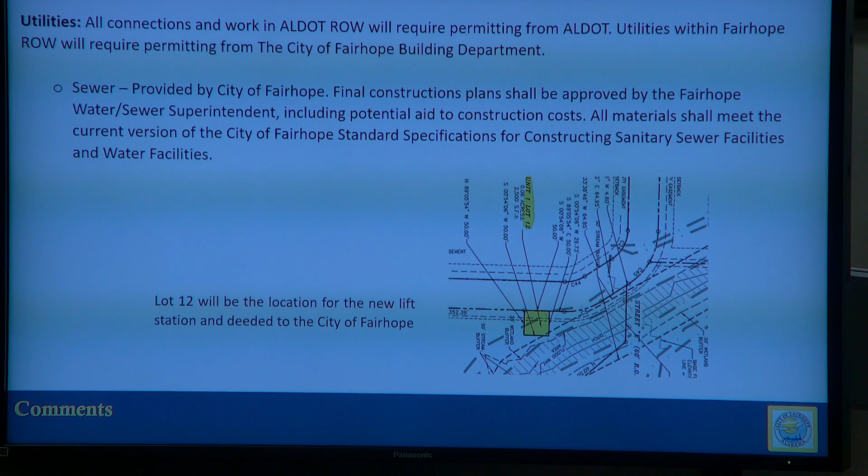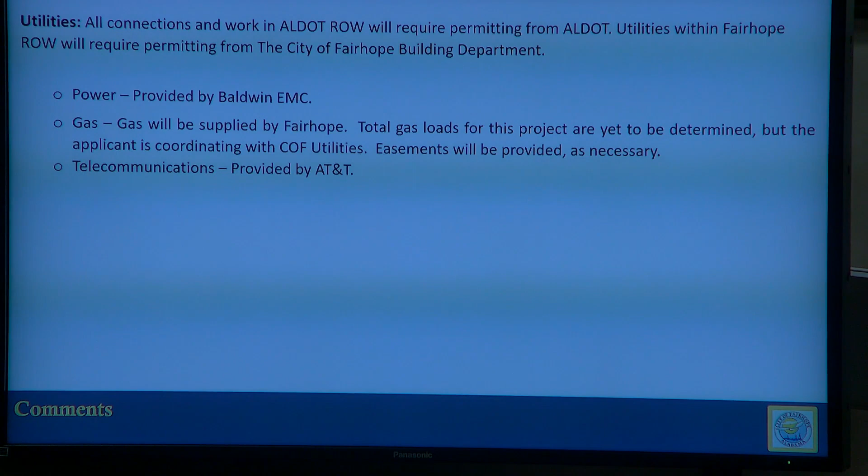Power is provided by Baldwin EMC. Gas will be supplied by Fairhope. Total gas loads for the project have yet to be determined, and the applicant is coordinating with the City of Fairhope Utilities. Telecommunications are provided by AT&T.

A traffic study was completed. As mentioned, we've already had one preliminary plat approved. This slightly changed the arrangement of streets, adding access to Gayfer and eliminating the one off of Highway 181. The traffic study considered all three units: the 15 commercial lots, the 233-unit multifamily housing in the center, and the 50-unit senior adult housing area on the northwest corner of the property. Uses were based off our B2 general business district, and the traffic study actually limited those a bit further. The table is included for reference as well.

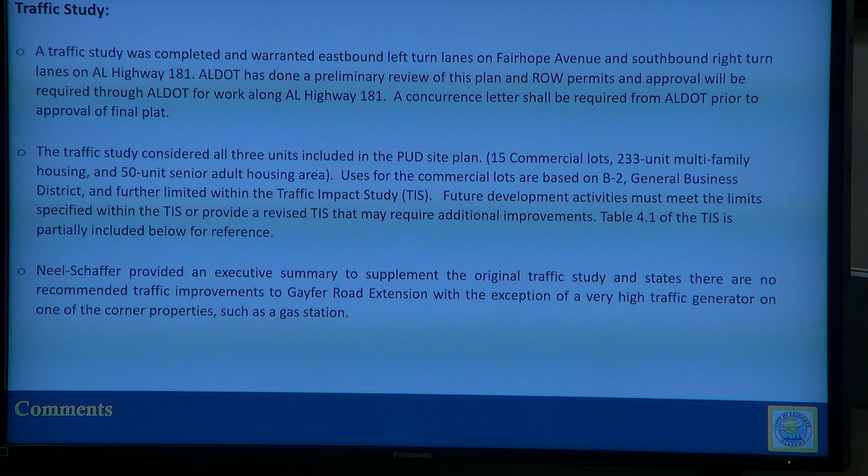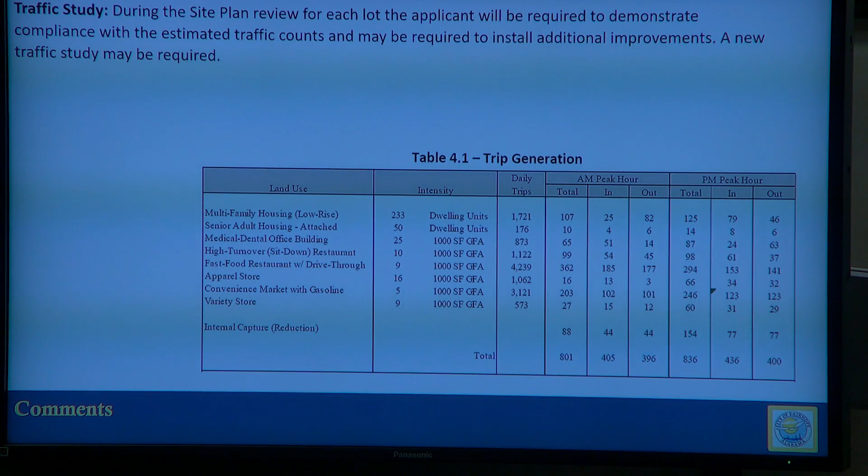Neel-Schaffer provided an executive summary supplementing the traffic study, highlighting that no improvements are currently recommended for the Gayfer Road extension, with the exception of if a very high traffic generator business, such as a gas station, was to go on one of those corner properties. During site plan review, each lot's applicant will be required to demonstrate compliance with the estimated traffic counts, which could require additional improvements, and a new traffic study may be required. Table 4.1 lists what was reviewed during that traffic study.

Drainage: the site is mildly sloped. Currently, stormwater travels under Highway 181 through existing pipes. We have a master drainage plan, and the individual lots will tie into that main stormwater system. During site plan review, that is another item that will be reviewed. The applicant at that time, for each individual lot, will be required to have engineered information showing that it meets this master drainage plan.

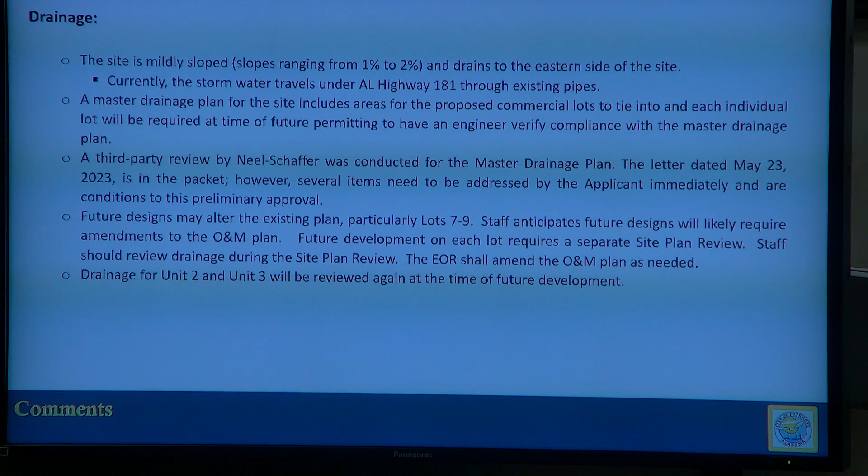Our O&M plan, we've discussed this evening on another project, but that recorded O&M has a high probability it'll have to be re-recorded and amended, particularly for lots 7 through 9, as alterations to that drainage plan could occur or additions to that drainage network. Drainage for Unit 2 and Unit 3, when those are developed, will be reviewed at that time again.

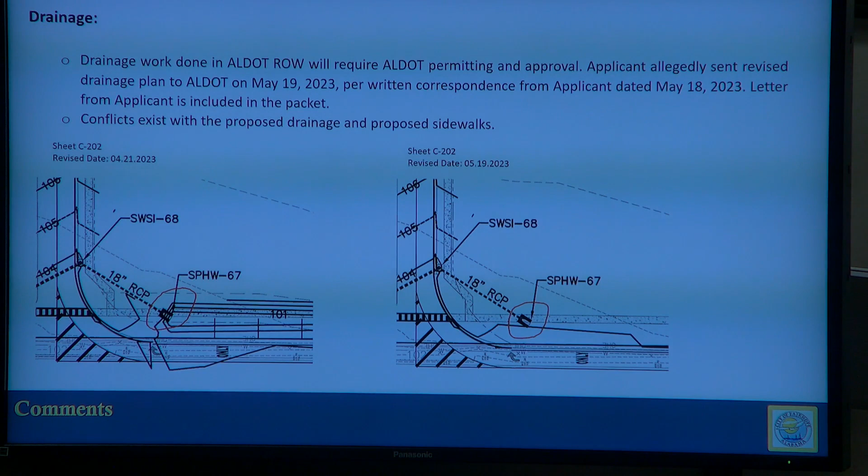Some of the drainage, we do have another conflict with the sidewalk. Initial staff comment was there was a drainage swale on your left side. The plans we received in April, our comment was how was the sidewalk going to be located on the side of the ditch. The swale was removed and the water rerouted. There is still a drainage structure located on top of the sidewalk, so that conflict will need to be resolved prior to construction.

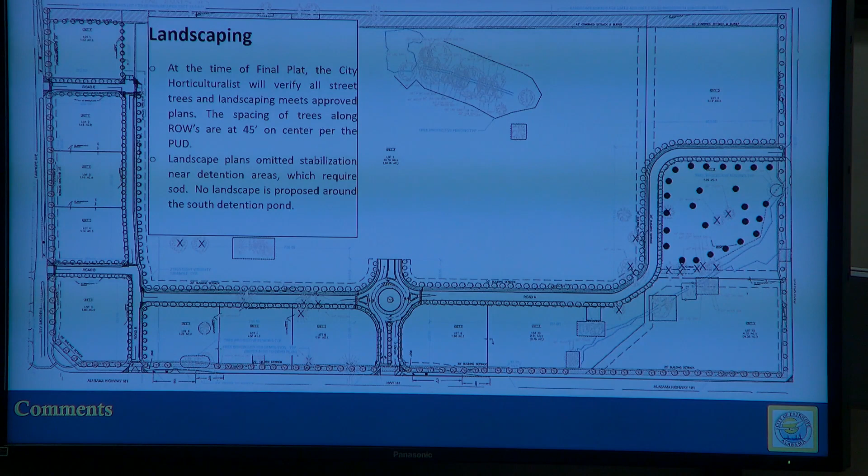Landscaping was reviewed during the PUD as well as this case, and at the time of final plat, the horticulturalist will verify that all street trees and landscaping meet the approved plans. Landscape plans did omit stabilization near the detention area, which requires sod, and no landscaping is currently proposed around the south detention pond.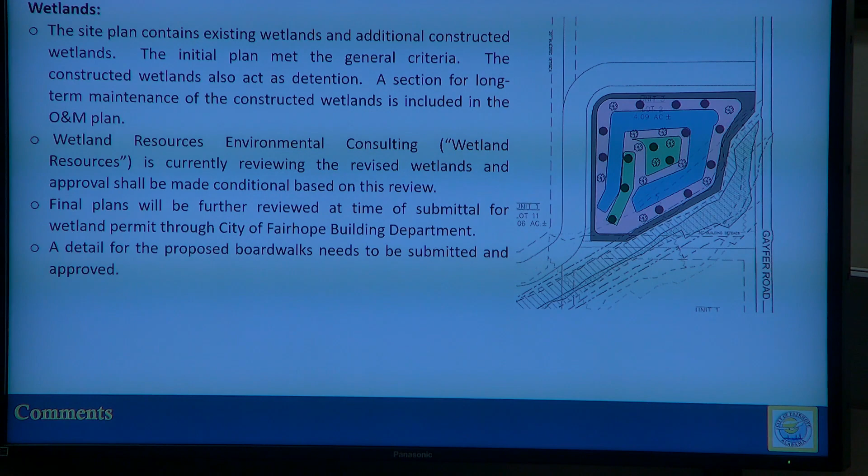Currently under review is Wetland Resources Environmental Consulting, and approval shall be made conditional based upon this review. We had one review completed that required some revisions, so those revisions are what are being reviewed again at this time. Any final plans will be further reviewed at the time of permitting for their wetland permit through the City of Fairhope Building Department. We also need a detail for the proposed boardwalk to be submitted and approved.

Some general comments: the plans show a temporary sediment pond on lots 7 and 8 to be utilized during construction, but that will be removed prior to final plat or after stabilization of the site as directed by the building official. As mentioned, a mandatory site plan review is required for each lot per the PUD ordinance 1764. Detailed review for utilities, drainage, and traffic will occur for compliance at that time.

Staff does request a new digital submittal package containing the following items. Those are some of the items that have minor modifications, and we want to be sure that, at the end of the day, we have a clean copy of everything as is, so we're not going back through multiple edits trying to find them later.

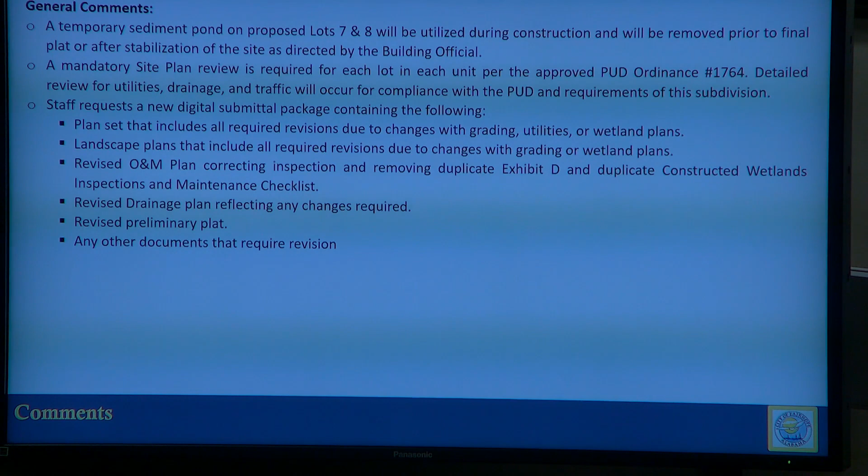So staff recommendation is approval with the following conditions. A handful of these items are notes for on plats. I will run through these real quick, and if there's any questions on any of them as I get to them, please do stop me. One, the traffic improvements or drainage improvements recommended by the traffic study are installed by the developer prior to application for final plat. Drainage updates per Neel-Schaffer's request shall be provided prior to the building permit application, and that is any permit for the site.

Approval for the constructed wetland north detention is subject to any recommendations or modifications that come from the third-party review by Wetland Resources, which has been reviewed once, my changes have been made, and this is the final review.

The final placement capacity and aid to construction cost for all utilities shall be approved by the respective superintendent, and they shall be determined prior to the application for building permit. Five, all sidewalks and street trees are required to be installed prior to the final plat application.

Six, uses in Unit 3 shall be limited to those specified within the TIS. Revised TIS may be required. Seven, all existing buildings and structures must be removed before final plat application.

Eight, the landscape island inside the roundabout shall be shown and labeled common area on the plat with a note that clearly states the owner is responsible for maintenance. Nine, revise note 6 on the plat to read PUD ordinance number 1764.

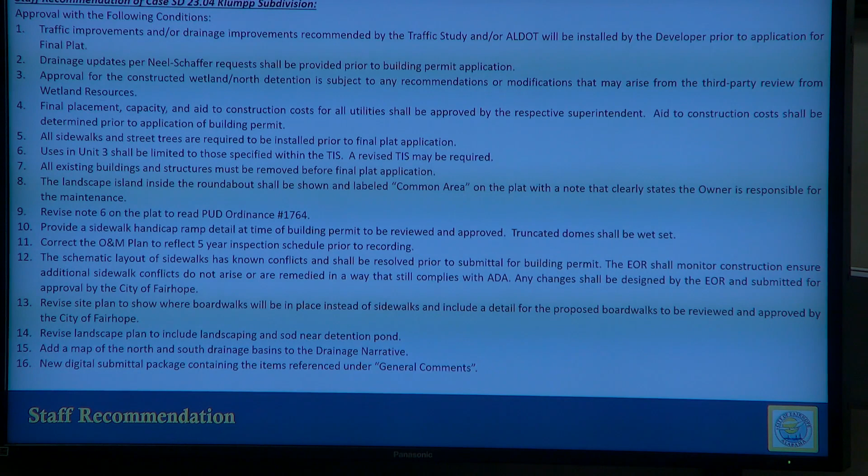Now, I understand that these are 16 items on this list - same argument y'all made earlier, it would be similar. However, with this being a PUD, there are items that need to be specified in the conditions when we go back to look at final plat to ensure conformance with that PUD plan. And then there's also federal and state permits that are required, so some of these are just making sure, like ALDOT, we get a concurrence letter. There's wetlands that does require outside Corps permits.

And it's an 80-acre mixed-use development, not 0.4 acres with 4 homes. Our utility reviews have 10 standard comments that are on all of those, kind of as a note to the applicant, to the engineer, to us - don't forget that these are things. The note on here that the street trees and sidewalks have to be placed, that's in our subdivision regulations.

Yeah, but it's an item, yeah, we got that, we got to move on. I mean, I get it. This crap can't be done until they can go out there and build the sidewalk. This is memorializing it for y'all. We get it, all right. It's for us and it helps more later. It's great, we get it, no block. I've got no problem with that.

So we don't need to talk about it for 30 minutes now. We've got to talk about our legal stuff here. Any other questions? Any other questions?

No, I think it's good to put them in the public record, I agree, after we made such a... No, I agree, I think it's great to put it in there, but we don't need to talk about why it's in there for 30 minutes.